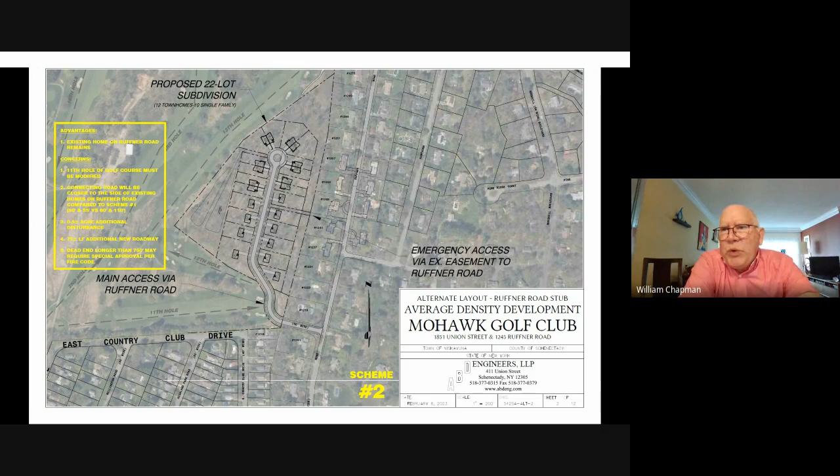To drive, I think that yes. They didn't — it's a lot of, so I don't have it in this packet, but the developer did submit it, and essentially a 22 single family home subdivision would generate 10 to 15 cars maximum, like in a peak AM and PM. But when you connect East Country Club Drive through this neighborhood and then through to Rao Road or Ruffner Road, it's monumentally higher.

And I think they were happy to look at pedestrian connections at any point, but they didn't at that time support the vehicular connections between East Country Club Drive and like Rao and Ruffner. It was Rao specifically that they looked at, like making it a through road from East Country Club Drive up to Rao.

But they did listen, but didn't want to do that. Okay.

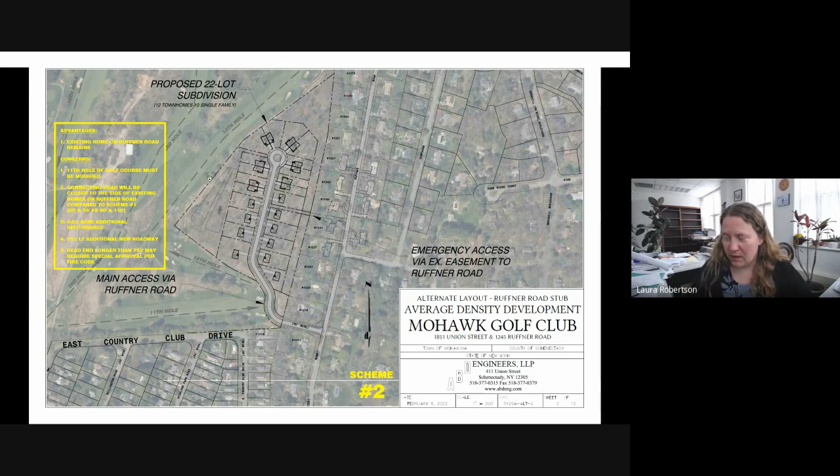One thing I noticed on this one, I'm guessing theoretically - because I can bring up that other drawing we looked at last meeting, which felt like a huge win for Complete Streets. They showed an engineered possible multi-use path connection between East Country Club Drive and Ruffner Road. I don't think this proposal hurts that connection in any way. The connection would just go here, and then you could pull the path down the side of the right of way there.

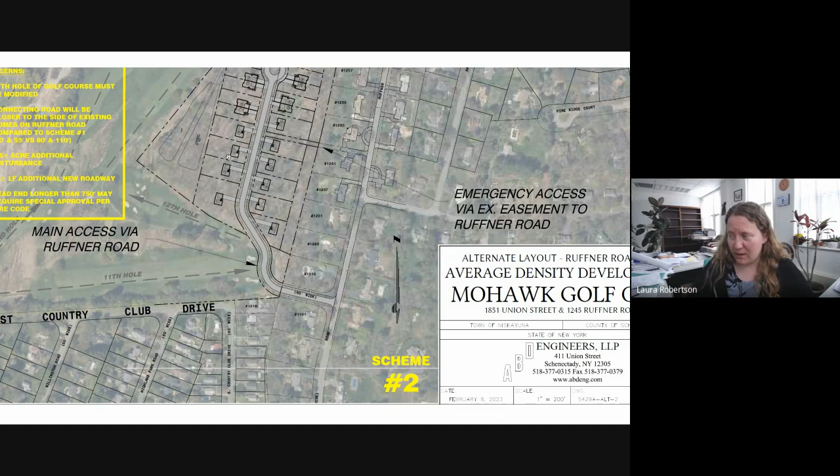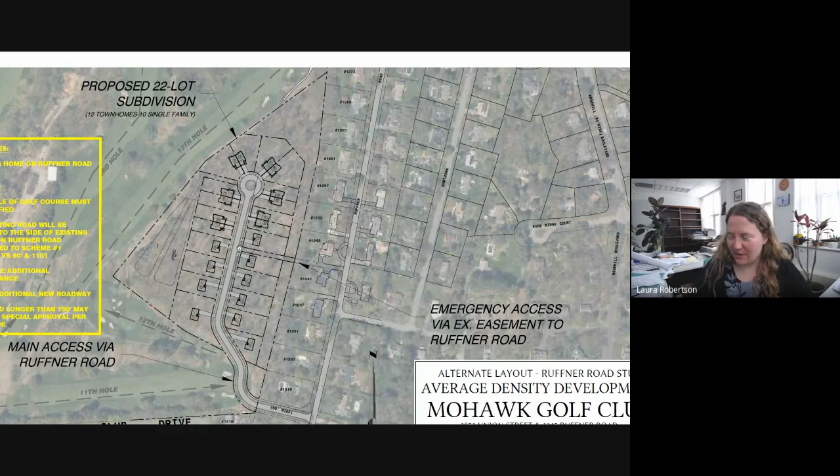But now you have this long cul-de-sac with no way out, and this is proposed to be grass over to these guys. I don't know, you have to balance everything, but maybe you could put a walking path here - like before, if you remember, the emergency access was shown over to Rao. You might be able to also just put a walking connection over to Rao so there's a lot more walking paths.

Yeah, and it doesn't look like they show it that way. It would be a walk path from Country Club to the roadway here, and then you'd go down this road and get out to Rao Road at the other end.

You could. I think the only one the planning board and developer have been talking about so far is the East Country Club Drive connection to Ruffner Road, a walking connection. This one's proposed to be emergency access only, grass pavers, sort of like hard surface grass.

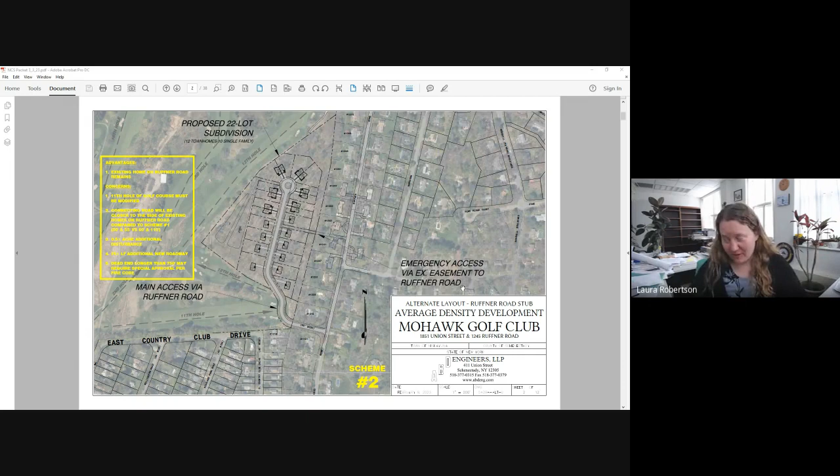But on a different drawing, I don't know if you remember, it also showed you can kind of tie into a golf cart path over there that goes over to Rao Road. Of course there's, I suppose, logistic issues with it - it's on private property, and it goes along a golf course where people are playing golf. So there could be logistical issues with it.

Where would it exit out at the end? Yeah, wait, here, I'll show you. I should have just had it in here. I didn't think about it though until just now.

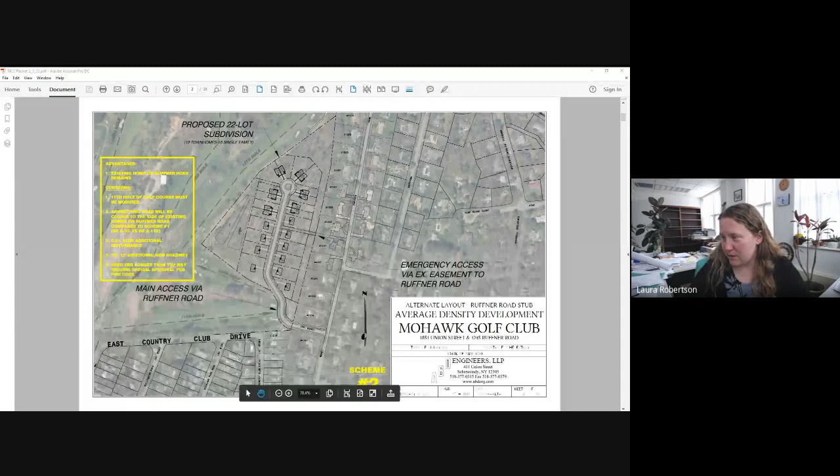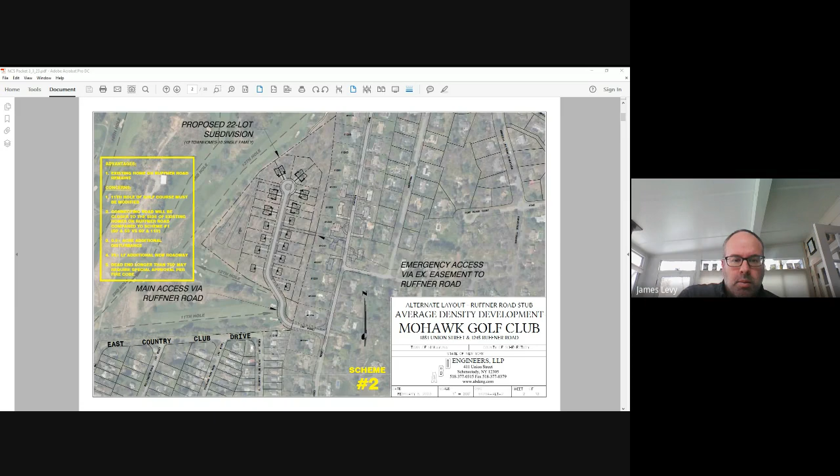And Laura, this doesn't show sidewalks in the proposal either, right? So there's nothing - there's technically some Complete Streets work to be done with the whole thing. Right, because it's still very preliminary - just a constantly evolving project.

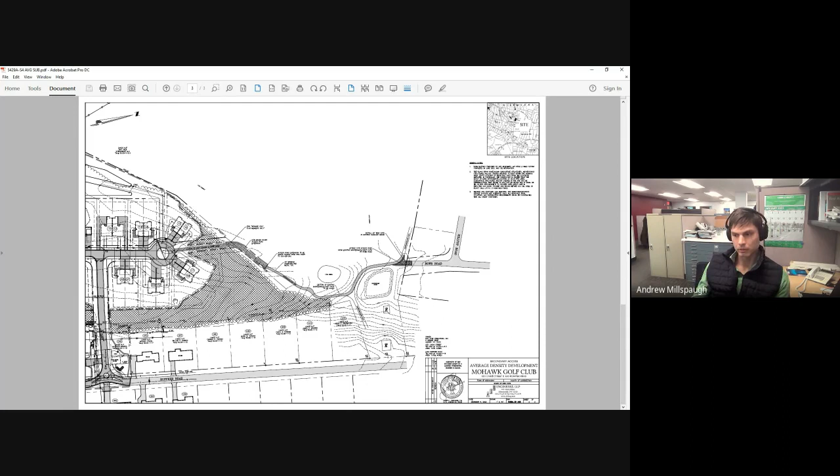Yeah, and I assume the applicant wouldn't want to connect the road now to Howe to eliminate the dead end, because that's going to mess with the hole there. But you could theoretically do that now, since you're not making a cut through from Country Club - it's not a cut through road anymore. It would be Ruffner. Yeah.

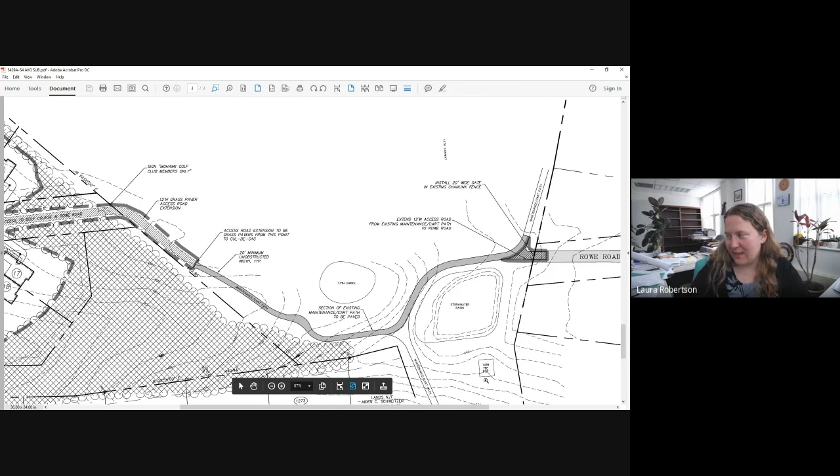This may be a little harder to conceptualize because there's no aerial, but this is kind of the end of the cul-de-sac, and it goes along - there's a golf course over to this stub on Howe Road. But would the golf course give permission to go on their property if it's a public hike and bike path? You'd have to get an easement, and it might be hard because here's the 14th tee box, so people would theoretically be hitting balls over and across this path. So I don't know - it's just a thought, but anywhere you can put in walking connections would be really good.

And I think it would be cool if you could somehow put walking connections between all three of the neighborhoods. It definitely would be cool. And if I lived over there, it would add a nice loop versus feeling like here's this little dead end neighborhood just encroaching on my view of what was previously green space. If at any time the golf course would be amenable to compromise, it would be now.

I was at one of the planning board meetings, and the residents - and so was Laura, I bet she's been at a whole bunch - but the residents in the neighborhood are really up in arms about that development happening. So I'm sure that's why it's so in flux, but just not wanting it in their backyard sort of thing.

Laura, sorry, office dog barking at the wrong time.

This development, the parcel is owned by the golf course, right? Yeah, it's currently owned by the golf course.

Tess made a good point. If there's ever a time to talk about connectivity, it's now. They're coming in asking for the ability to develop, so if we want to have something done, now's the time to do it. It always is when a development comes in, but certainly if they own the property, now's the time to talk with them about that, even if they had to realign things, which we talked about when they came in with some of the original proposals, when they showed potential connections, cart paths and things. They'd have to redevelop and redesign that whole area potentially.

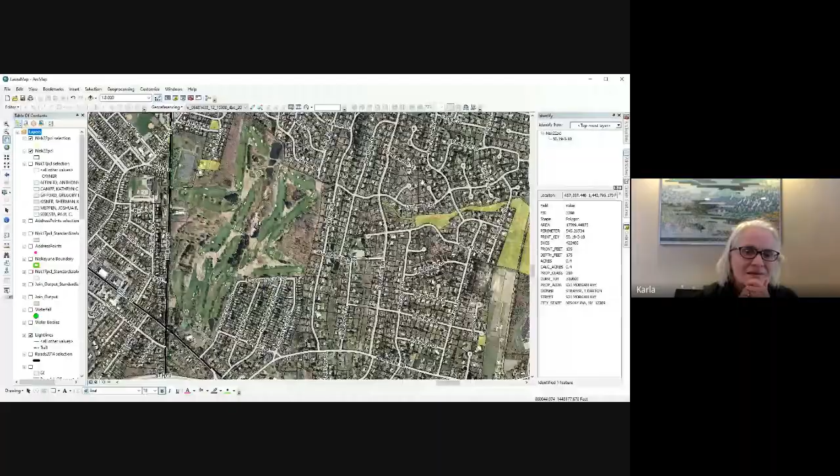Right now, this is East Country Club Drive, and the only way that the majority of these homes can get out of their neighborhood is to drive south, to Union Street or Rosendale Road. If they're going north to ShopRite Plaza or somewhere like that, they may go out to Rosendale Road, take a right, and come up Ruffner, or they may use Rose Hill or one of the roads further up.

But if you were to connect all of these homes to Howe Road, if they were going north, there'd be almost no reason for them to go down to Union Street and up Balltown Road. They'd go up Howe over to Hilltop and keep going that way. That's why. This is just 22 homes, but this other area is like 100 or more. It would be nice for the people who live there, but when you're trying to make this work for all the neighborhoods, 15 cars versus 100 is quite a difference.

It goes to show why you have to do things up front the first time and not try to go back and do it later. This is a perfect example that if it's always been that way, it would always be that way. Going in and changing it later changes what people have been used to for eons and generations, and change is difficult and often not desired. So this isn't only for complete streets, but I think it's a perfect example of that. That's why we bring planning projects to you to look for easements and connections in the future.

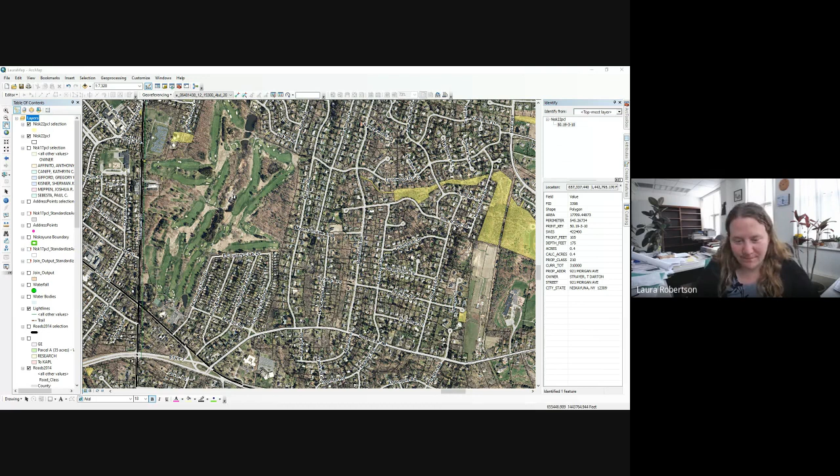Thanks. I think that's one of the reasons it's good that Laura brings projects to Complete Streets — at least we get a chance to put our input in. Sometimes the town board and planning board will accept it and push to get some Complete Streets things in, but sometimes neighbors object. If we were all residents on Howe Road and had to look at another 100 cars a day, we might look at it the way they do as well.

I do feel, like with Knott Street East, the connection to River Road was in the town plan for 20 years. The neighbors objected, but we still got a bike and pedestrian connection there. So half a loaf is better than none, and I still think we should keep trying to do the bike and pedestrian connection.

So you may not be able to drive your car north, but if you can walk, get on your bike, or walk your dog and still get over to Howe Road using this, I think that would be a win — take their bikes and trailers to the ShopRite. Getting people out of cars is something we're trying to do as well, reducing vehicle trips, particularly for recreation trips.

That's another objective. So my recommendation from you guys, on this extremely preliminary plan change, would be to push for pedestrian connections to Howe and Ruffner as they're evolving. And I think Jim's got a good point — we have a little leverage with the golf course now, being able to get a pedestrian connection over to Howe, that we should use.

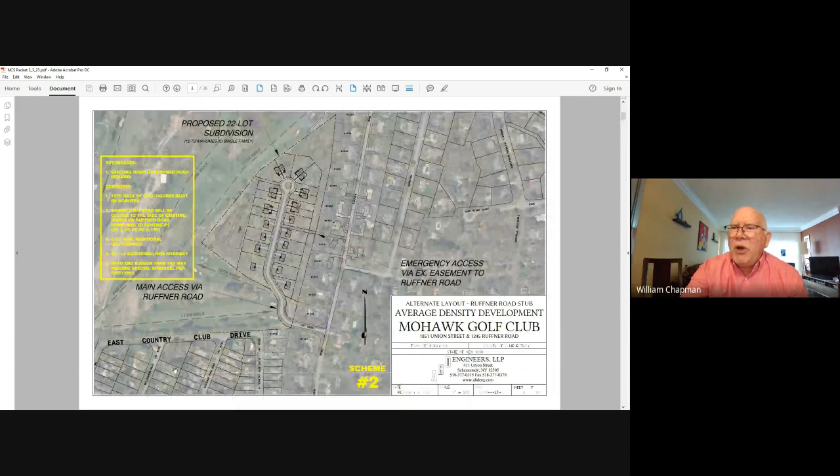Catherine, do you have to go early? Is that right? I'm here with my family in Florida, and this is our last day here, so I have to leave early today. I'd love to spend the rest of the day with this group, but well, let me ask you—

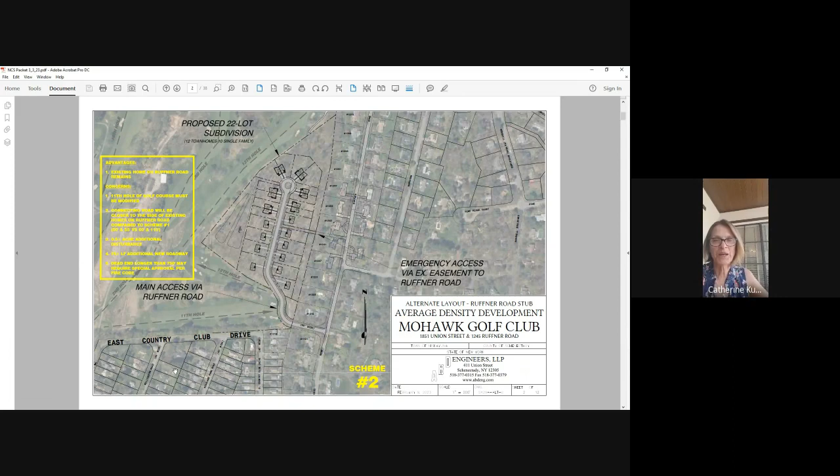Can you just give us 2 minutes on Troy Road before you go? I know you've given us some suggestions — we're going to get to it later in the agenda, but is there anything you want to say on Troy Road before you go?

Well, I don't know how much — there was an article in the paper, I think everybody saw it. A district attorney reached out to the Department of Transportation on this issue because there have been several fatalities. I'm assuming there are many lawsuits going on right now, and everybody's being sued left and right, so DOT would obviously get involved at that time. We're coming at a different angle on this — we're looking for ways to slow the traffic down so we can have a safer environment for all users on Route 7.

That's basically what we're interested in. We're not interested in any of these lawsuits. So it's really about looking forward and finding ways to really slow the traffic down, and we're not going to do it solely through law enforcement.

I do think this is a good time to put pressure on the department. If they know the community is really interested in some solutions, and we can come up with some obvious solutions, I think... and they've been done before on that route. So I don't know how much of a push this is going to be, but I think this is a good time to make our point to the department while it's still on their radar. We don't want this to lapse too long.

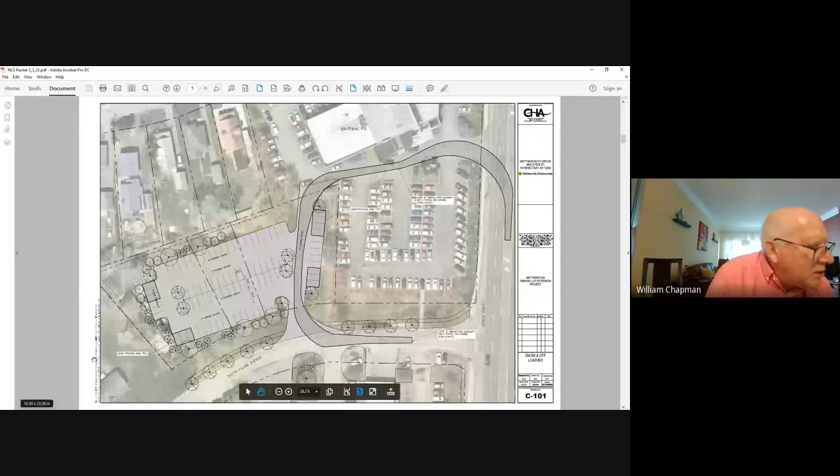So this one you guys looked at last time, and I thought you had a really good recommendation to add a sidewalk. Your recommendation was actually to add a sidewalk from Albany Street all the way to State Street.

I did push for that. This plan only shows a sidewalk in front of the lots that they're proposing to change, but this is their proposed sidewalk right here, see it right here, and they're also showing street trees, which I like.

So can we ask them to move that sidewalk all the way down to Albany Street, or is that too heavy of a lift for this? We did. We can ask again.

I mean, I'm always into that. Man, it would be nice if you could get from State Street to Albany Street on a sidewalk, I guess. So, unless it's a big lift to get the additional—is it one more house that gets you to Albany Street? It's actually quite a ways. Oh, okay, well.

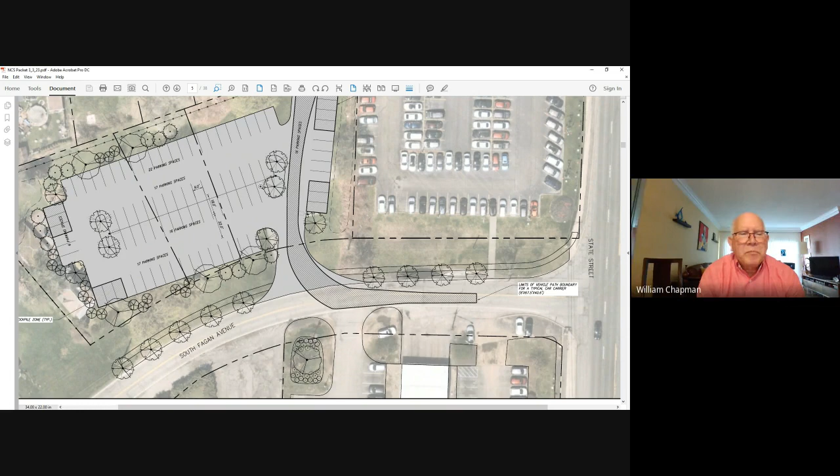The only other thing—I don't know if this falls into the Complete Streets realm or not—but this shaded line you see is actually the line for tractor trailers, because right now there are tractor trailers of cars that come to be delivered, like new cars. You know how you see them, there's like six of them, and they're all funky on the 18-wheeler.

When they come and drop off their new cars right now, they are not going onto the site to drop off the new cars. They're actually either pulling into the turn lane on State Street and dropping off the new cars there, or they're pulling into these side streets—this is South Fagan Ave, and the other one is South Amherst Ave. They're pulling the 18-wheelers onto these side streets and unloading the cars there, which is really disruptive to the residential neighborhoods on the side streets.

So the planning board was trying to figure out a way that they could get the 18-wheelers onto this parcel. These shaded areas are the turn radiuses that the 18-wheelers would need to get into this parcel and then out. So this proposal shows the 18-wheelers would theoretically be able to get off the streets. The only thing I think is missing is there isn't anywhere on the parcel where they can actually park and unload.

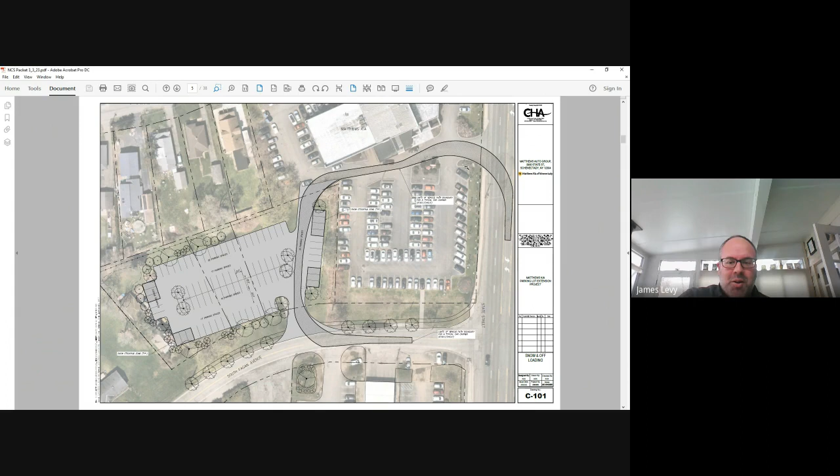I dealt with this exact thing in another community. Same thing, they were dropping off cars on village streets and the neighbors did not like it. No, it's really disruptive to the residential neighborhoods. At some point, sometimes they even have two of them doing it at the same time, and then emergency services can't get through.

Yeah, I mean, I think we should insist on Jim's point. It's not just a nuisance for the people on South Fagan Avenue, but really for motorists on State Street or Central Avenue. So we should ask for that to be part of the approval for the project. So I'll reiterate: sidewalk all the way to Albany Street, and drop off has to be on site.

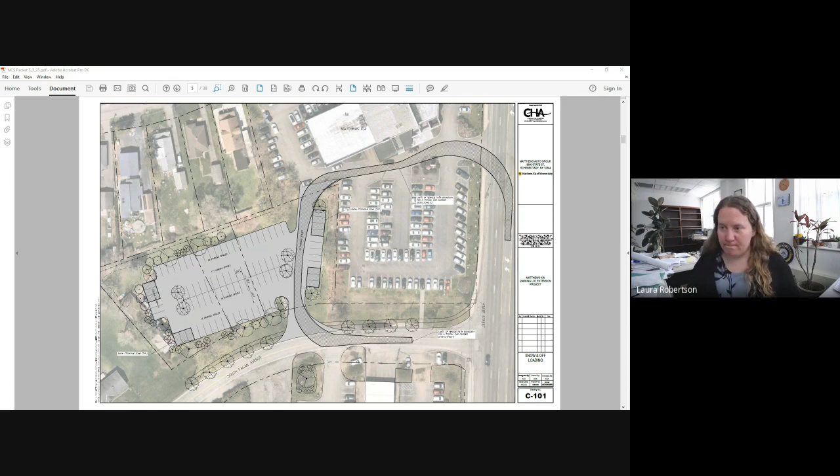I just heard it's okay if they don't have a designated spot on site, as long as the tractor trailer can fit and they don't do it outside of their site. Okay, any other comments on 3900 State Street?

Okay, good. Let's move on to 31 East Street then, please.

So 31 East Street, might actually be better if I bring up a different map, but it's a current dry storage area that is going to the planning board for updates. It's right along the Mohawk Hudson Bike Hike Trail, and they're proposing more landscaping. I'm not sure if there are things we can think about that would help with complete streets, but if the planning board is touching the parcel, you guys have ideas of something that might make a good connection there.

I'm going to bring it up on a different map. This is a building that used to be owned by the town, and they stored snowplow vehicles and other vehicles at this end of town. It probably wasn't a good decision for the town to sell it, because it's nice to have vehicles already over at this end of town compared to them having to drive all the way from WTRY Road.

But do you know, Laura, are they making a change in use or something, or why would this even be in front of the planning board now for site plan review? Yeah, it's a tenant change. They did propose to add - right now there's no bathrooms, and there's a fair number of people that are there.

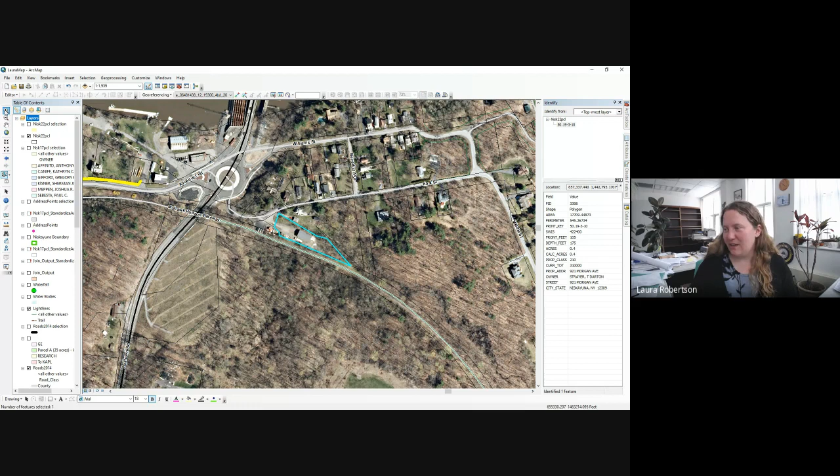Okay, where are we? Let me picture where we are. Here's the Rexford Bridge that's being built, on my aerial. Here's the Rexford traffic circle. This is the hill. Williams comes in here, Middle Street, East Street. I'll just zoom in for a second. When they redid the Rexford traffic bridge, they built this public parking access to the Mohawk Hudson Bike Hike Trail. This property is directly adjacent to the public access to the trail.

I thought maybe - any chance we could get some more parking spaces for the Hudson Mohawk bike path right there instead of just having 4 or 5? Is there any accommodation they might give us so the public would have more opportunity to park there and hop on the bike path?

I can ask, but I have to tell you, because I bring this project to so many different boards - it's not showing up very well in this aerial, but you'd get a big fight to pave more parking, because right here is like a nice wildflower field, and the CAC is trying really hard to protect pollinator habitat.

You've also got a pretty good slope headed toward Balltown if you go to the left of the screen here. As you go down, there's a hill there with emergency access, and this is also a very large cul-de-sac. You can see there's a car parked here - if these are full, you can actually fit quite a few more cars in and around. This is actually gated, so you probably shouldn't, but you could.

There's some parking right by the bridge too, isn't there? Oh yeah, you're right - there's also a public parking lot right here which can fit a ton of cars. I go there regularly and I've never seen that little lot filled. There's also a parking lot on the other side of Balltown, and technically there's parking in the town park as well, but it's kind of parallel-ish, not really. Yeah, parking is probably not an issue.

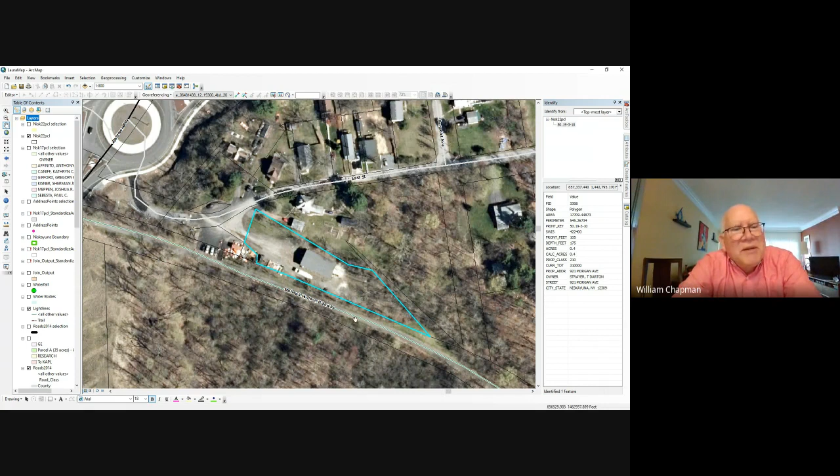What kind of business did you say it was? It's called an underlayment business. Isn't this where the concrete - they have the ready mix concrete trucks there? Isn't that right - now there's a concrete business there. Yeah, the one proposed to go in is an underlayment business, which I think also uses concrete, but they don't have the forms like they have right there. And those were actually not approved - so as part of the approval of the new tenant, all of that outdoor storage is going to go away.

It's hard to see on that plan, but one of the reasons I brought it to Complete Streets is that they're going to update the landscaping. I think they're going to try to landscape along the Mohawk Hudson Bike Hike Trail just to make it look slightly nicer for people using it. But my only comment was that I know using that stretch, there's a lot of outdoor storage on that property, and if it's a change of use and they're getting rid of that, there should be landscaping or fencing to screen it from the bike path.

Awesome, I'll put that in because I think that's good to come from you guys - landscaping along the bike path is important. Are they adding in 2 dumpsters too? There's actually dumpsters there already, but yes, they're showing where their dumpsters would be.

If they look at fencing, Laura, it'd be nice to have something more natural versus say a chain link fence with pieces of metal between it that block the view. Something more in keeping with the fact that it's getting into a historic part of town where the canal used to run through. Just be nice to have something more natural, not a metal chain link fence or something.

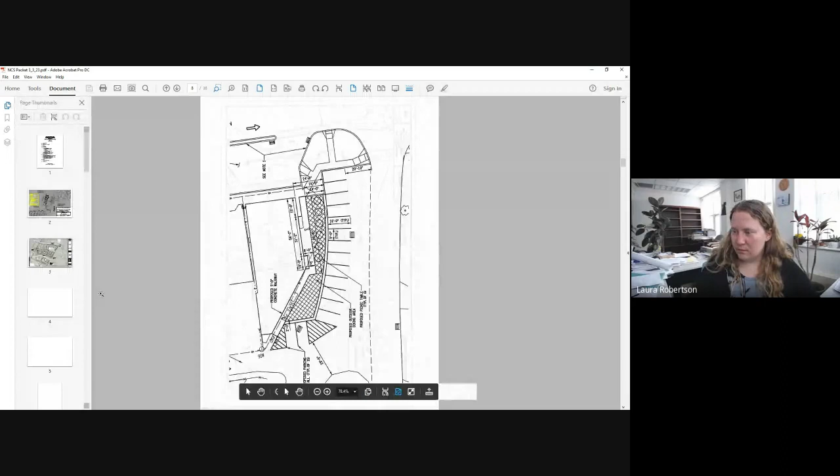Okay, let's move on to the Broken Inn. This is my last one for you guys. Oops, didn't realize I didn't turn that one.

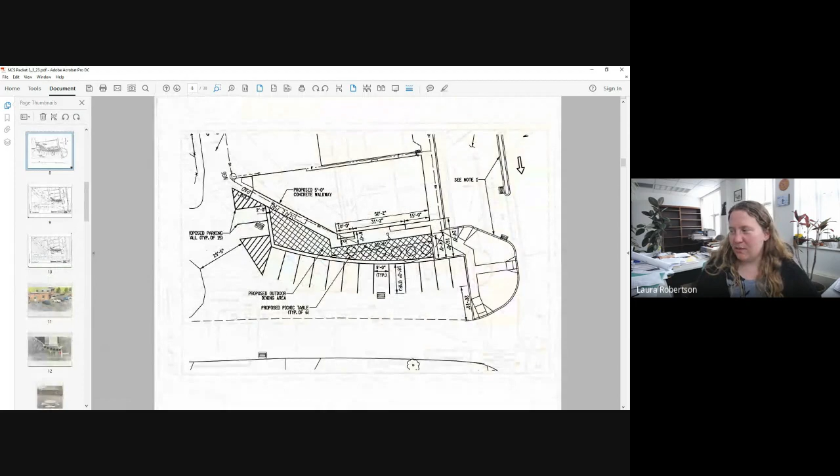So the Broken Inn is still trying to work on the intersection, and they came up with a new plan submitted to the planning board. This is less than what you guys saw before. The hatched off parking area was bigger before, and the parking stalls were closer to Clifton Park. That defined the edge of Clifton Park a little better, but cars would be backing right out into the road, which was a problem on that street. So this one has the parking spots closer to the building with more room for cars to back out before reaching the edge of Clifton Park.

It's also not quite defining the intersection of Crescent with Clifton Park, but it's getting closer. Right now, from this building all the way over to where the grass starts is just pavement with no lines on it. So this takes up probably a good 30 feet of that wide open space and narrows it down a little more.

The town itself is interested in making Crescent more of a T with Clifton Park Road, where Crescent would curve around, taking some of the green space or a tree or two at the end of the point to make it more of a T intersection with Clifton Park Road. I don't see that here. Maybe this is adequate. You still have traffic coming out of the alley and cars coming from Clifton Park Road.

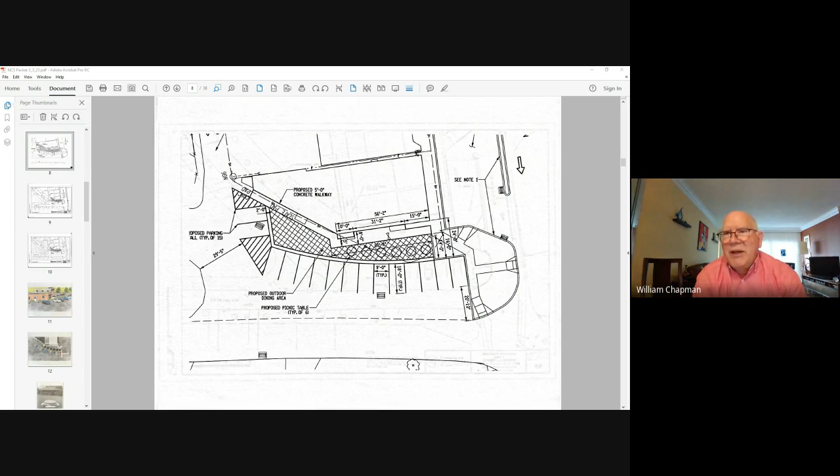So it'll still be kind of a no man's land area with cars and pedestrians entering this intersection from Crescent and Clifton Park Road. It's not as clean as having a nice T intersection. But I wouldn't say the town's not interested in doing that, I think they still are. One of the things the planning board said to them is, if you do this, it might be temporary, because the town is still trying to do something a little bit larger on the intersection of Crescent and Clifton.

That's almost what I was going to say. This seems like a nice potential change for the side of the building there, but I still think more needs to be done within the right of way to address that large area of pavement.

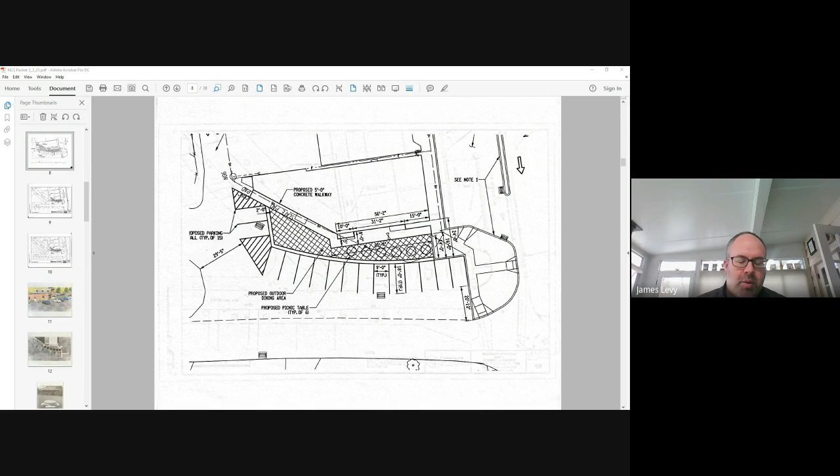And this looks like it's changing the parking that's there—aren't there spots front-end facing Knott Street now? Yes. So these would all be parking up against the building then, changing that? Our highway department doesn't really like those spots. But yeah, it is changing that. I'm not a huge fan of them either, but I think it's the curb—maybe the curb line's different, but anyway, that would change.

But yeah, I still think there's an issue with that corner. You do have to remove a little bit of curb to do this plan, because there's a bit of curb that sticks out right here to protect those parking spots. So you'd have to remove like probably 6 feet of curb.

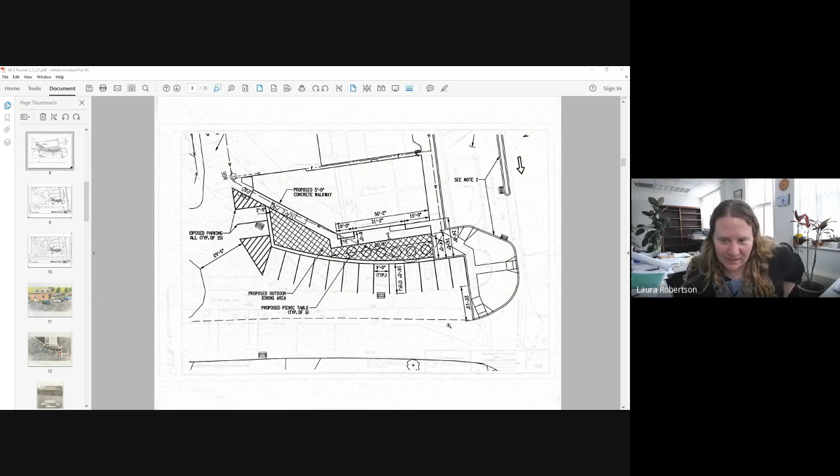So I'm going to write: potentially the town still needs to do more for safety at Clifton Park and Crescent.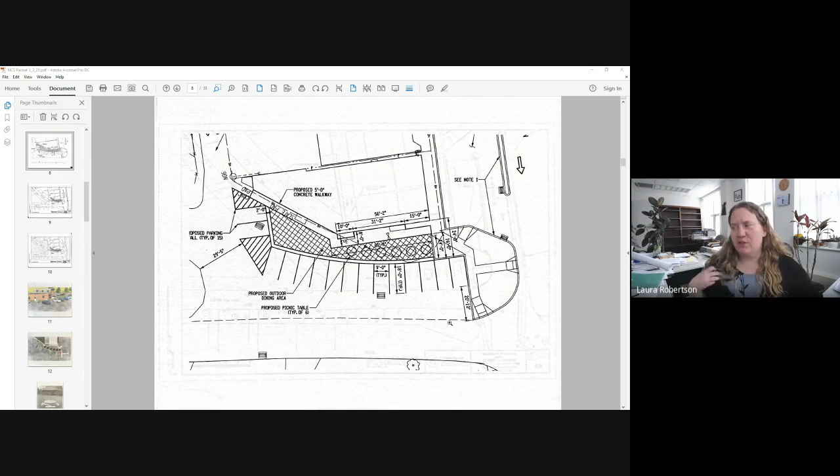It's gone through a lot of evolutions. It's sort of come back to closer to what it originally was. This is very close to what it originally is. We had nixed the roundabout there because the fire department had an issue with it. But if you were able to do something, you'd have traffic only going in one direction, so the parking wouldn't have to worry about there. Like something in the middle? Yeah.

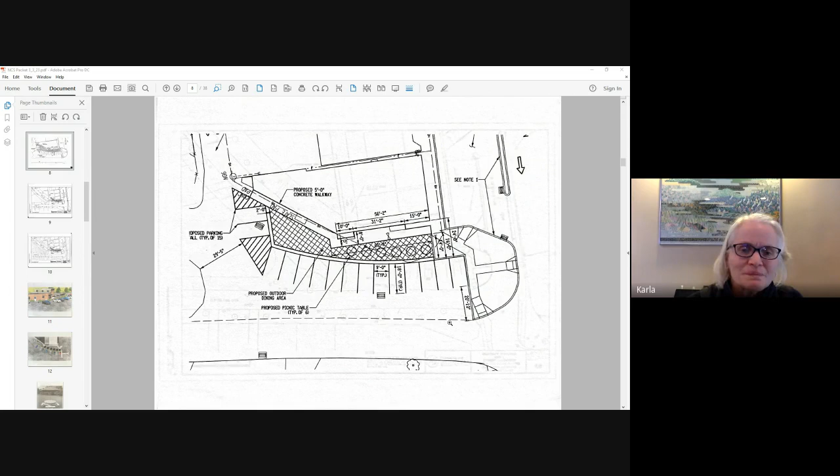But I really like that they want the outdoor seating area and everything. I think that's a huge improvement. I feel like nobody's ever disagreed with that. Although at the planning board level, the outdoor dining was a bit of an issue. This is just public seating that anybody could sit at, though probably mostly people eating the ice cream would use it.

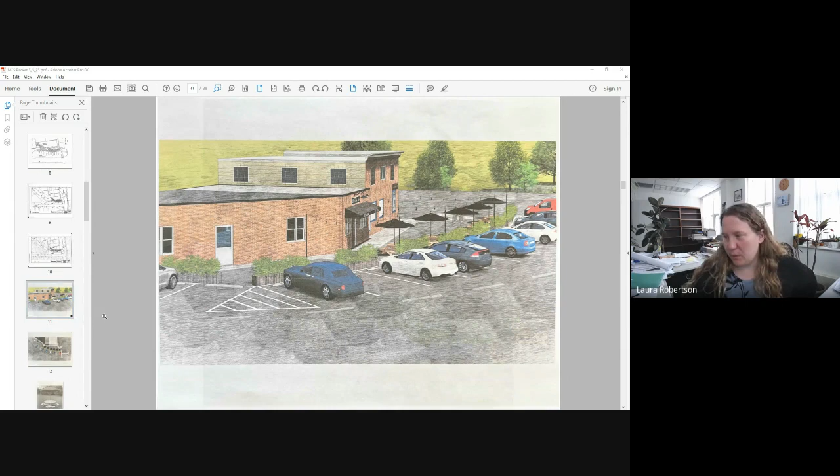Also, the tables won't be able to be configured like this because he's got to keep all the tables on the private property line. But I think the general striping and the location of the barriers between the cars and the pedestrian area would potentially be allowed, well, actually permanently, unless the town undertakes a bigger project that changes the Clifton Park and Crescent intersection.

Yeah, I'd still advocate for continuing to look at that intersection. I don't know if it's just me, but there are a ton of cars going down there to go to the school in the morning, probably not as many in the afternoon, and a lot of kids walking to the high school. There's just still a lot going on there, and it seems like it's even more, and the cars are flying now. People are getting so frustrated going down Clifton Park that they're starting to go down Valencia now as well, and even over to Regent. So there's still a lot of traffic going in and out of the high school in the morning, a lot of kids walking, just a lot going on over there.

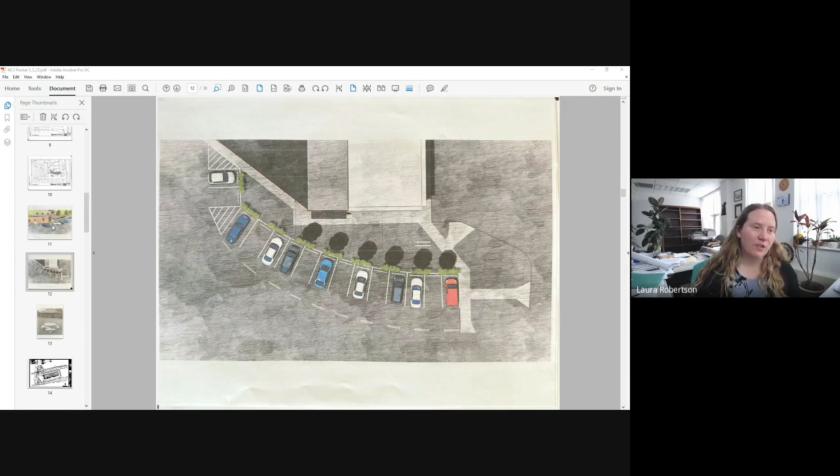Okay, I'll put that. So this is still in flux at the planning board and with the town highway superintendent. Is the planning board getting close to giving the green light to what we see right here and being done with it? No, I think the planning board only saw it for one meeting, so it's still work in progress.

Laura, I don't know if anyone's looking to do a demo project, but you could almost do a demo project with this to see what people thought. This doesn't preclude still doing anything at the intersection with Crescent, but we still have those cones sitting over at the highway garage. You could almost put the cones out in the same way and do some temporary paint on the ground and just see what it looked like, if people are still not sure. When you get to a point where this is a little further along, demo projects don't necessarily have to be just complete streets. Even showing how this parking layout would work and how it would change the look and layout of that part is something that can be done really easily.

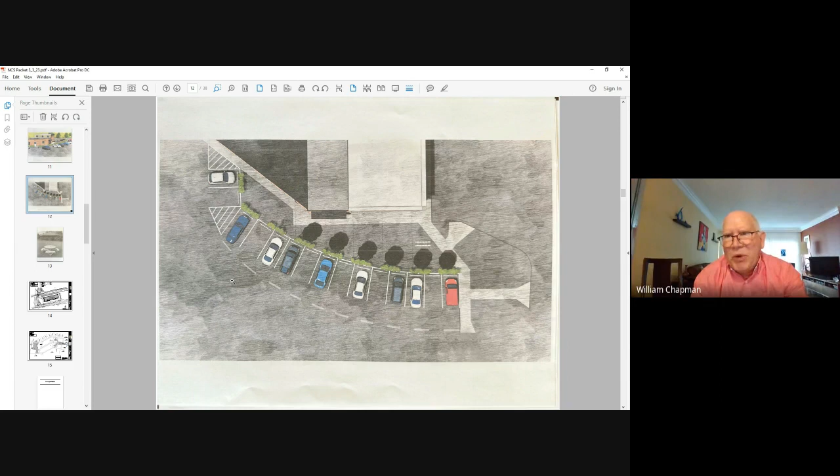Like I said, we've already got the cones. Set it up for a weekend and just see what it looks like, see how it may or may not narrow the road. What it doesn't do with cones is temporarily cut the shrubbery away and chip off that point, making Crescent more of a T with Clifton Park — that would be more involved. Just looking at what we have here gives an idea of what it would do to change that, because I don't think this precludes still doing something somewhere else. That's an advantage of this — it probably wouldn't interfere with the town doing more later.

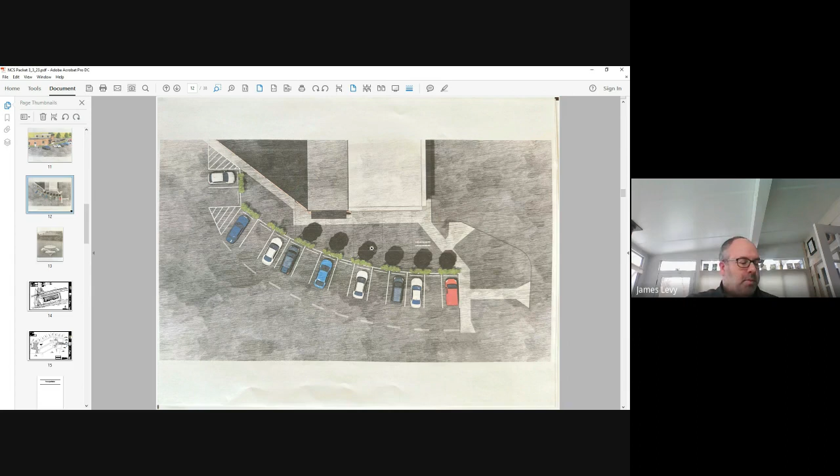Okay, anything else on Crescent and Clifton Park Road and the Broken Inn? Then we'll move on to Rivers Ledge at Niskayuna.

Okay, these don't have to take too long. Just an update on Rivers Ledge — there's a little bit more pavement around the building because they are unable to do the underground parking. So this will probably come back to you guys again next month. They're trying to figure out what it's going to look like to have the parking garages so close to the bike path.

And you can take a look. There's public parking that would be built to access the bike path. That's this parking lot here. They have a sidewalk that goes from the parking lot down to the bike path.

They also have a sidewalk connecting over to the new building, which would have some commercial space. They're talking about putting a little diner, like a breakfast and lunch diner, in there. Just to refresh your memory, we at one time looked at seeing if you could make a sidewalk connection down Aqueduct Road to the other place, but it's a lot of wetlands and things. So we decided the best thing to do is just funnel everybody onto the Mohawk Hudson Bike Hike Trail to get over to any different part of this community.

So instead of walking out on Aqueduct Road, the foot traffic would go in the back on the hike and bike path to get down to, say, the traffic circle at Aqueduct and Balltown Road. Yeah, correct. I think we decided it was better to put people on the trail. The topography and the wetlands would make it hard to do a sidewalk along Aqueduct there.

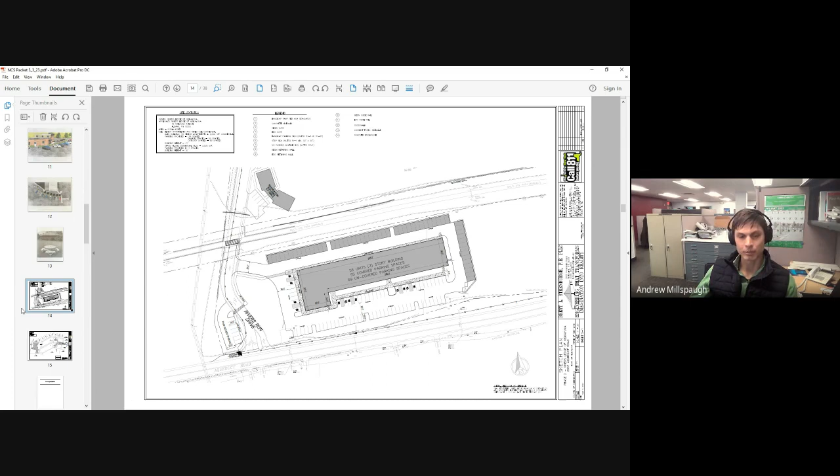I see there's the common parking there for park access, for like a communal bike pump or bike repair station that some people have along bike paths, where it's just a little station with a communal bike pump and some tools, with a lanyard on them so you can't steal them. That's a great idea. They probably would do something like that too. I can ask them. But no, they don't have that yet.

Or is this mixed use or all residential? I didn't hear that. Oh, the 55 unit building? Yeah, it's mixed use, but it's only a tiny bit of commercial.

Do you see this little pop out spot here? Yeah, that's where they would propose to put a diner, a very small amount of commercial. So bike racks, covered bike racks or something like that for that use would definitely be something, and that could tie right into what Andrew was talking about. If they did that here, something like Andrew's talking about would actually be better served being near a business that's got eyes on it, because those stations do get vandalized over time. People rail on them pretty good.

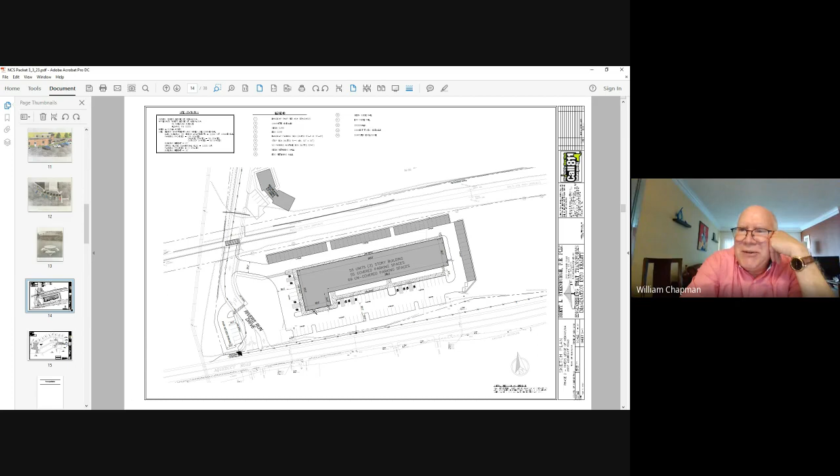Covered bike racks and a bike service station. Would it be way too far, Laura, to think about a bathroom for men and women that ride on the bike path, a relief station somewhere along here? Or is that covered? There's one in the park, isn't there? Yes, there's a public bathroom not very far from here.

Okay, so my other question, Laura, the covered parking space, is it just a top over the spaces, not a garage? No, it'll be a garage. It will be a garage, with a wall behind it.

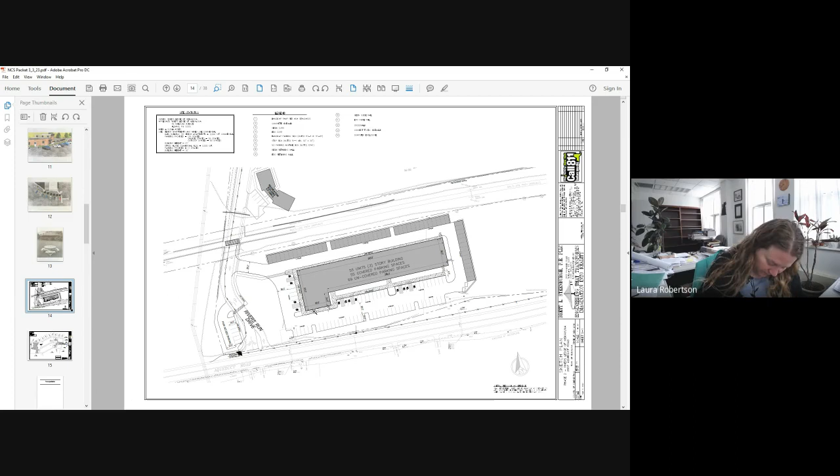Then I think it would have a similar comment to what Andrew made before. If they're taking a lot of landscaping down, putting some landscaping back in just to buffer the walls that'll be created from all those structures would be nice, between it and the bike path. I know there are a lot of trees back there, so hopefully they can preserve some, or maybe it's just brush and weed trees, I don't know. But something to buffer the garage needs to be there, to break that up, because otherwise it'll end up looking like a wall.

It's long. Yeah, I agree. And I think they're also even on a retaining wall.

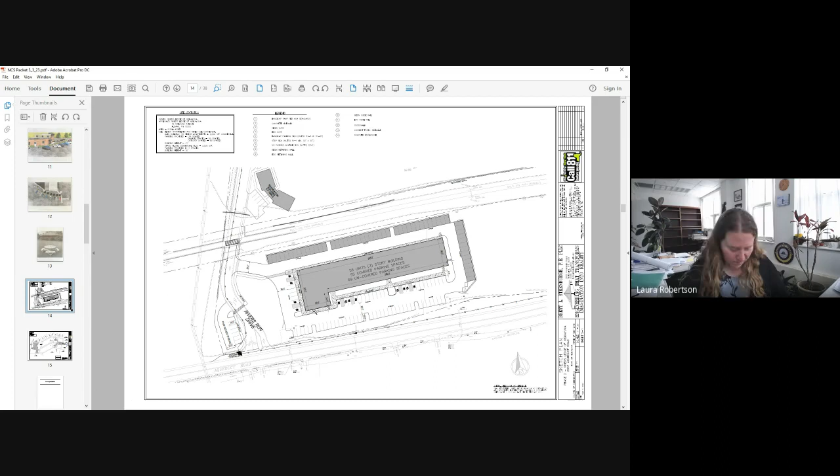Okay, so I got covered bike racks. Would the covered bike racks be for the residents or for anybody using the commercial area? Well, I'm thinking bike racks for the commercial area. Especially something like a small diner, people typically like to ride there or stop on a ride. So covered bike racks potentially for residents, or space in the building for residents. But I was thinking more for people who would utilize the business from off site. Okay, so covered bike racks for the commercial area.

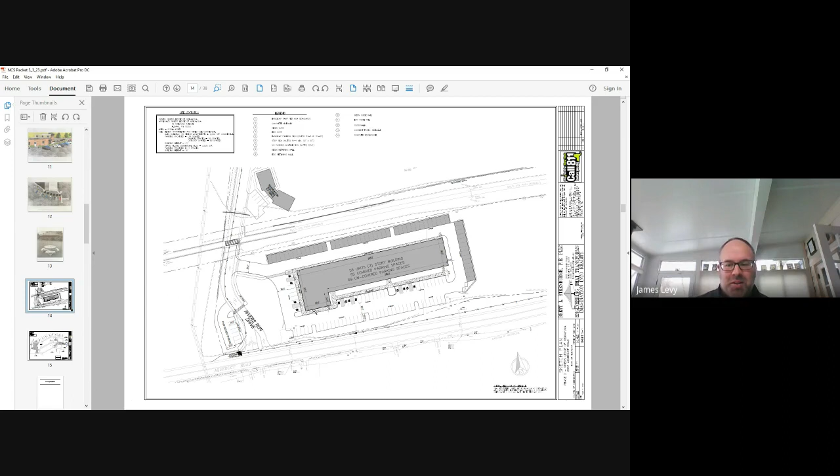And if not covered, regular ones, but people like to cover their bikes. If it starts raining, it's a place to ditch your bike and go get a coffee. That's completely true. And then a bike service station, and then buffer garage walls to the bike path.

See, that's why I bring things to you guys. You're amazing.

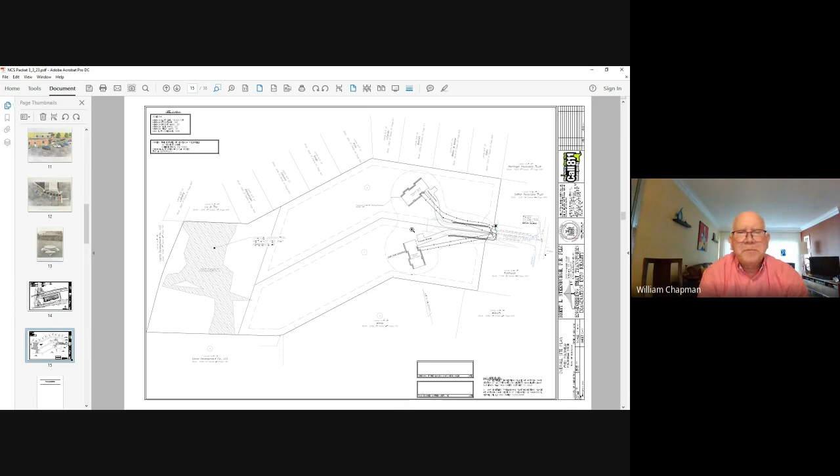Okay, last one is the Polsinelli Drive subdivision. I thought maybe we had looked at it before, but I looked in our agendas and I couldn't find this one. I may bring this up on a different map. This is over off of Rowe Road. There's a little bit of forest there, a stub called Polsinelli Drive, and they're proposing to do 2 lots. I don't really know of any connections we might be able to make, but I always bring these things to you guys.

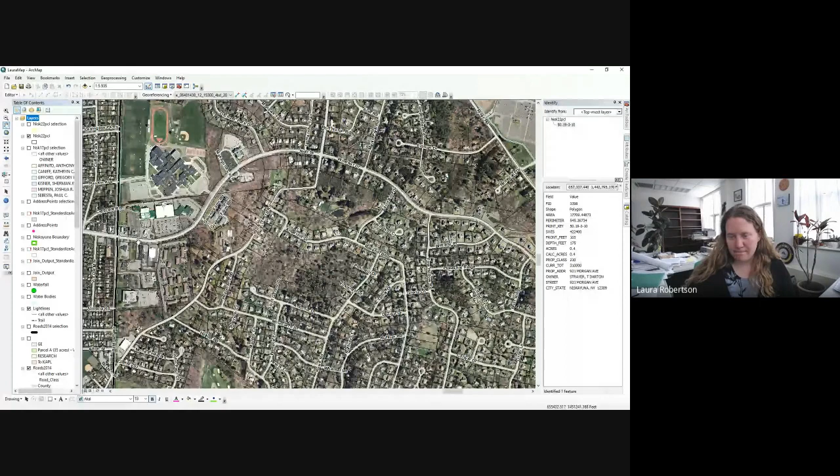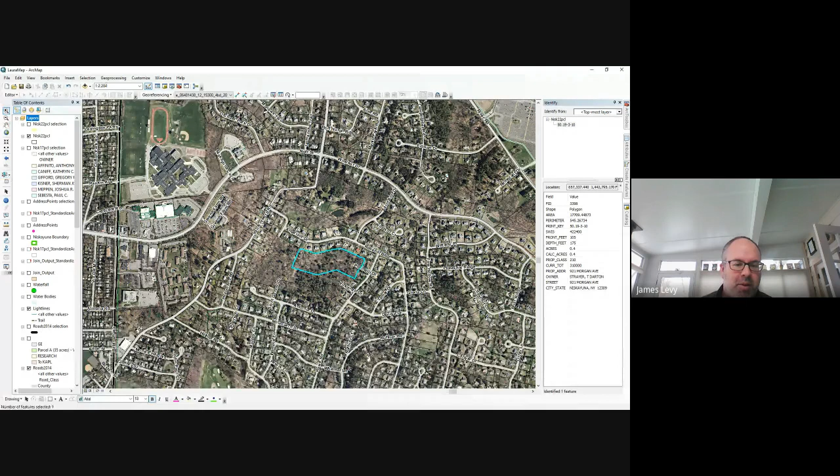I think we talked about this once. Did we? Maybe not, I couldn't formally find it but I remember talking about something like this in that area. Maybe it wasn't this, but I remember talking about something up there. Maybe we just don't have any recommendations, and that's why I couldn't find it. Which is fine, we don't have to spend a lot of time on it.

I don't think there's much. Well, I see Rose Hill Boulevard, then Angelina up to Antonia and then maybe back on Van Antwerp. But if there are students on Rowe Road or even people over in East Country Club who want to get to the high school, if they bike down Rowe Road then onto Polsinelli, if there was a hike and bike trail that went through here and came out onto Van Antwerp Road somewhere, is there a little strip of undeveloped land over here?

No, you've also got wetlands over there. You could come up on Van Antwerp and get onto Greens Farm Road, that would get you over to the high school. So it'd be a bikeway that would get you over to East Street. No, probably not, the whole back of the parcel is wetlands.

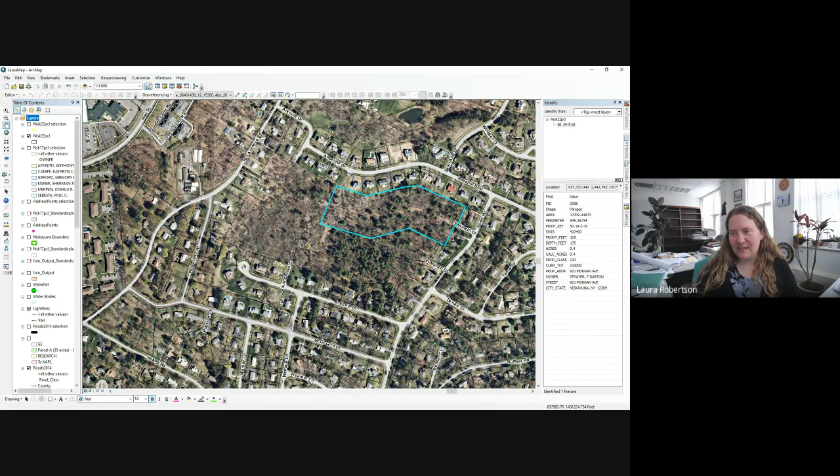Given the neighborhood, I don't know, looking at the trade-offs, I don't know that even promoting the idea of a trail through there through wetlands would buy us much. Well Laura, where your cursor just was, I think this aerial's a little outdated, there's a little more to the south. What's that road there? Saint Gerard. Aren't there 2 houses built there now? Yeah, they're right, so I guess it's not all wetlands back there. I guess since there's development, the wetlands are on this parcel.

Laura, does the town have any fee in lieu of for anything like park and rec fees when you get lots developed? We do, yeah. It's like $1,500 per lot or something like that in the R1 zone, a park and rec fee.

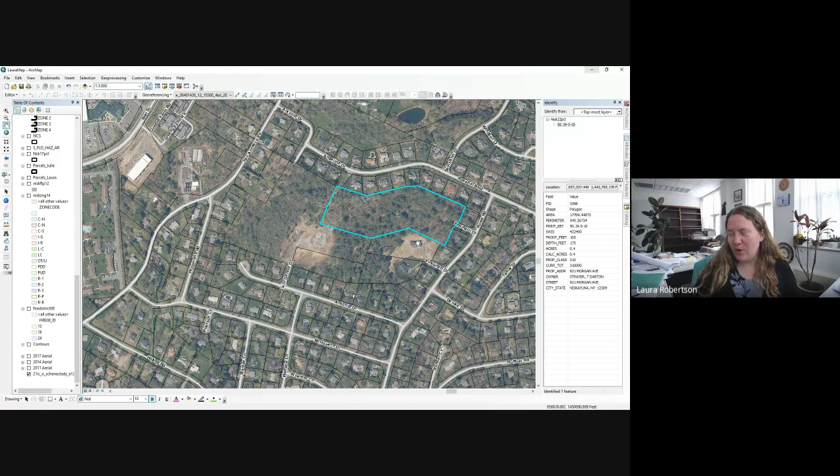Would this green space be a walk area, like a nature preserve area, maybe a town park that would just be a passive park? Or an access way to a passive park? Actually it's green space. Do you see how these two homes come off of Vincenzo? They're proposing to do the exact same thing off of Polsinelli. So like these two homes, the driveways come and hit Vincenzo. They would put a home here and a home here right along this part. This would stay all privately owned. This back part would be to the two homes, kind of like where these lots are. I'll just highlight them, really similar.

And then this back part goes into this other lot over here. Where would be the access way if they wanted to build houses in the back part? What road would they tie to? They don't have an access way. No, they can't. That would be it. Right, that would be the two lots.

I guess I'm wondering, could the town ask that this be a conservation easement, just walkable green space? Oh, we did. They said no. But I could put that as your recommendation.

A developer obviously wants to get a house on every square foot, but it'd be in the town's interest to get some. I don't know that that's true in this case because he's only putting two 3-acre lots on like a 10-acre parcel.

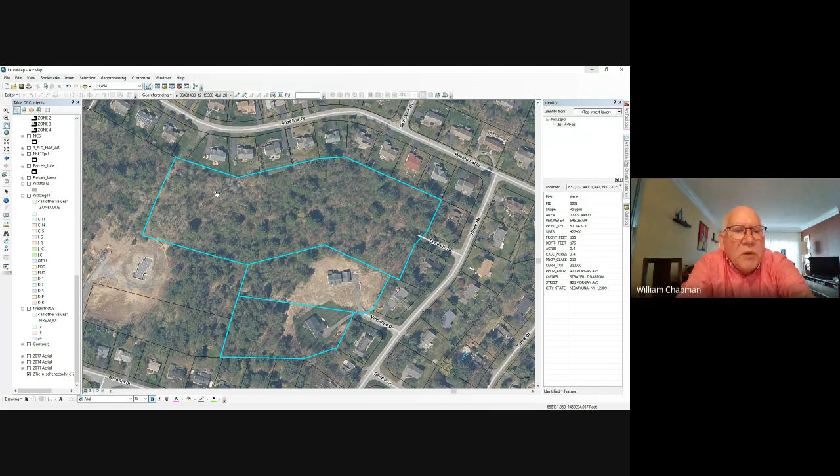So the only reason I raised the fee-in-lieu-of thing is I'm thinking we're seeing more of these infill lots where nothing really happens, and it's a policy decision that would have to be made by the town board. In addition to a park and rec fee, if something comes in, I'm wondering if we could have a similar new lot fee - if you can't put in a sidewalk or multi-use path, we collect a fee in lieu of. It wouldn't have to be large, but it could start to add up on lots like this or others where it may not make sense.

It starts to build a pot of money. Well, to Jim's point, I guess these are minor subdivisions, but if this whole area was subdivided at the same time, it would have been a major, which might have had more connections, more considerations there. Yeah, absolutely.

We're trying to retrofit and fill in big portions of what's already been done in the town, and that takes money and effort. We do have a park and rec fee - if this is enough of a priority for our residents and elected officials, maybe that's another thing to consider. Again, it's a policy thing way beyond us, but just thinking about it.

I think it's a really good idea - maybe for the future, put the seed out there now and see if anyone picks up on it. Would we have to tell the planning board about that idea, or put it in the master plan as our recommendation - that we couldn't really identify a sidewalk or multi-use path, but potentially if we're doing code amendments, you should consider adding an impact fee for these places that can't fit them. Perfect.